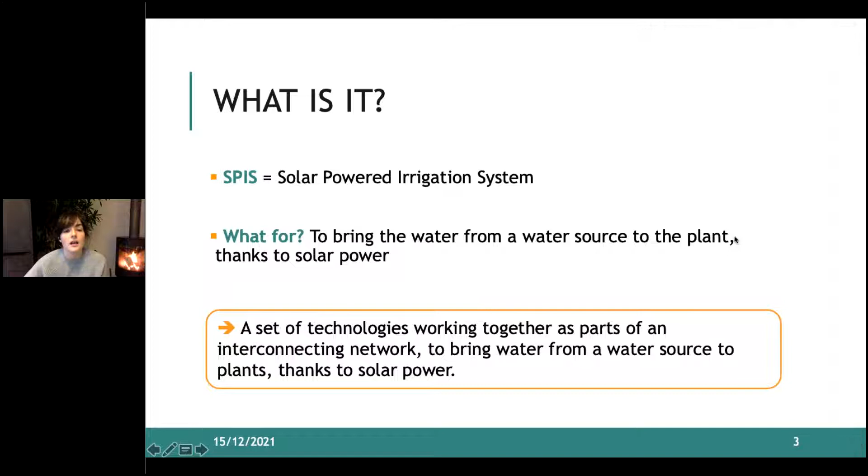And it is the following: a set of technologies working together as part of an interconnecting network, which is basically a system, to bring water from a source to plants thanks to solar power. So now that we know what is a system, what do we need to make it? Well, we need a water source, we need a pump, a solar generator,

which in most cases, if not all the time, will be solar panels, a conveyance system, which is basically the piping system that will bring the water from one element to the other, and an application system, which will be the technology that distributes the water between the plants, trying to give approximately the same quantity of water to each plant. I just wanted to point out that manual application, like for example with watering cans, is also considered to be an application system.

Now, as you can expect, for each of these types of technology, there are many different models, brands, types that exist and that are available on the market. But not all of them fit with each other and not all of them will match your situation. So basically, there is no one size fits all system, and you're going to have to determine which technologies fit with your context and which technologies fit with each other. But how to do that? How to select the right technology?

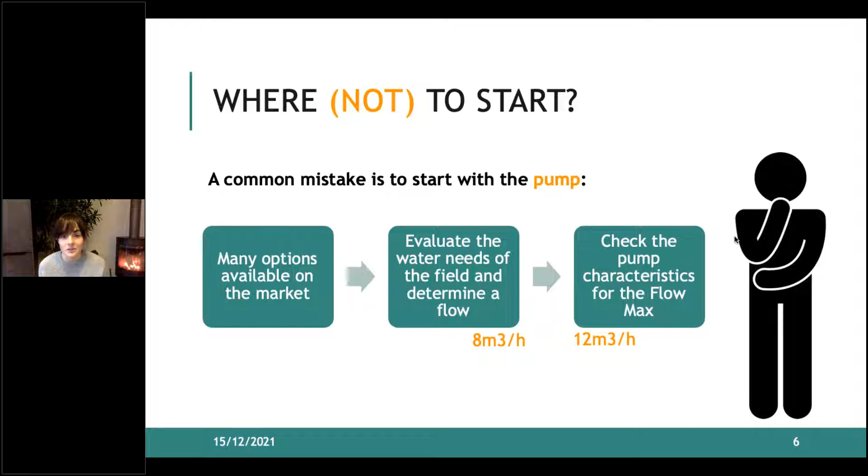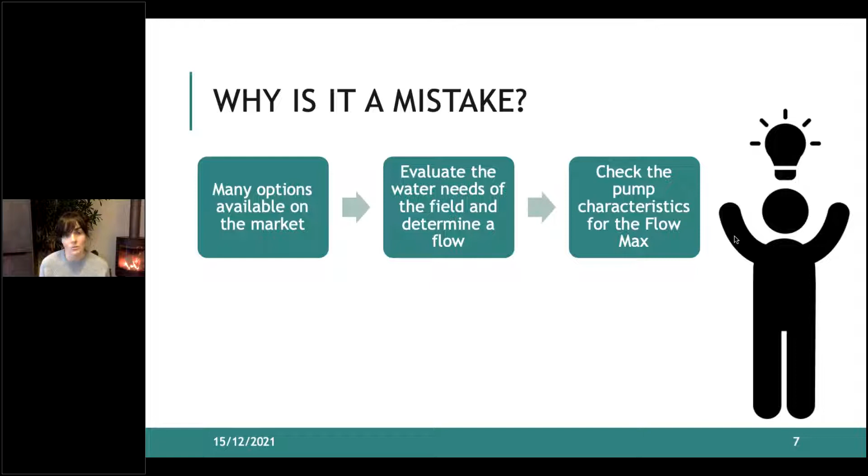Well, the truth is there are many reasons why it wouldn't work. And I'm going to explain now 2 of the mistakes that you made and 2 of the reasons why it might not work. The first thing is that you looked at the needs of your crops, the needs of your field, but you did not look at your water source and at the water that was available in your water source. So if you're pumping water from a river that never dries or a lake, then most likely you won't have this problem.

But if you're using a well or a borehole, when you pump water out of it, the well needs to recharge. There needs to be water flowing back in. And if the water that flows back in is slower than the water that you pump, your well will dry out. And no matter which pump you have, you won't be able to irrigate the whole field that you planned for. So most likely it means also that you used a pump that is too big compared to the area that you will be able to irrigate.

Maybe even your application system will be too big. So you basically run the risk of oversizing your system and also of not making an efficient use of the resource.

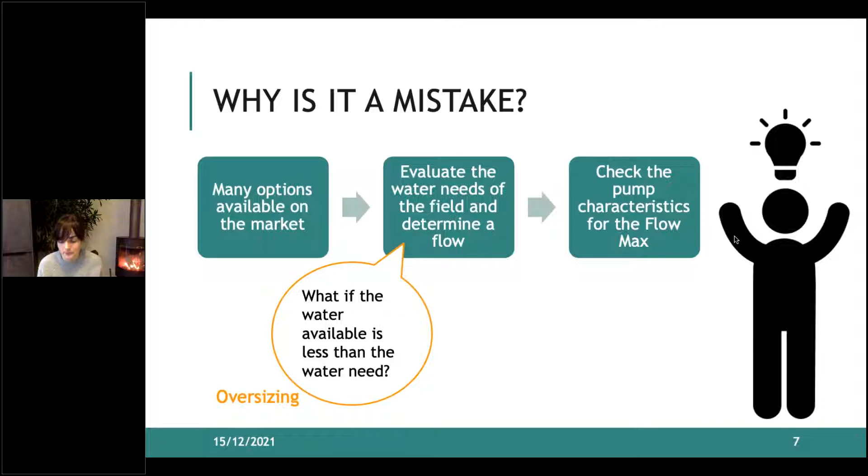Now, the second thing is that you looked at the maximum flow of what the pump can provide. But what you need to know is that the flow of the pump varies according to the depth of the water, the height of your system, the type of application system you're using, and even the conveyance pipes that you're using. So the same pump, if it's placed in a source where the water is at 3 meter depth, or in a source where the water is at 8 meter depth, it won't be able to provide the same flow.

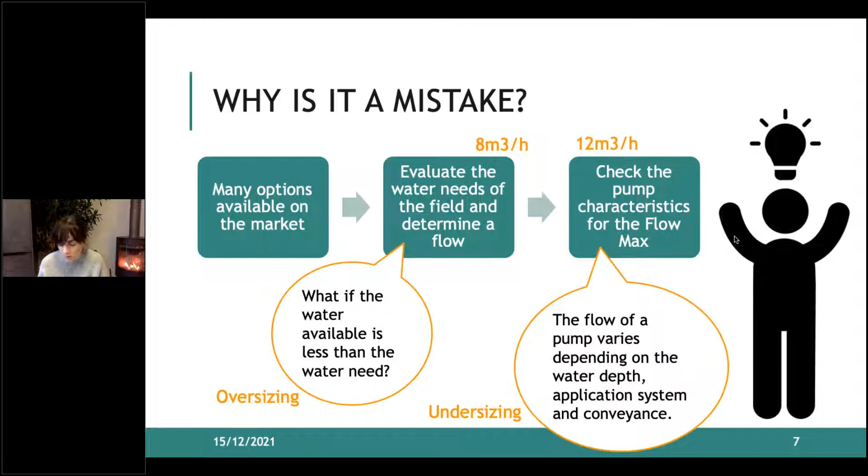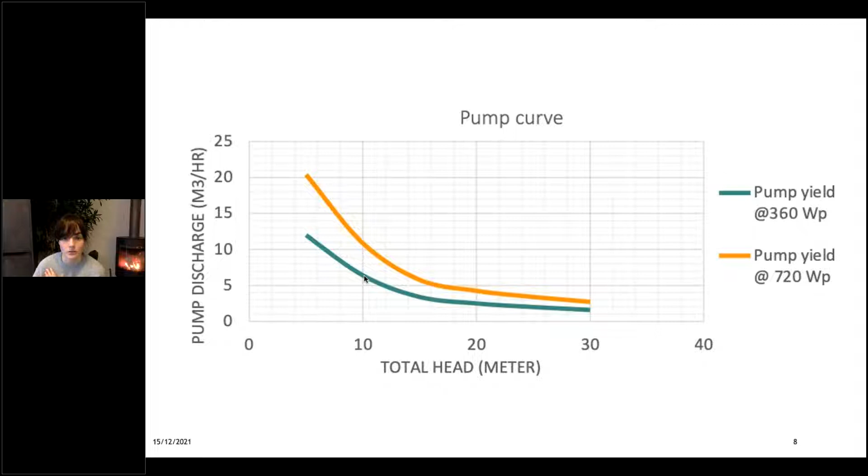I think it was important that I started by presenting why you should not do that, because it's important to understand the reasons why these mistakes are being made and why they should not be made, because it's a very natural way of thinking, I think, but you should always start at the water source. So that leads me to the next slide. You should always start by collecting information on what you have, and you should always start by the water source. You will be collecting information on the water source, the field, the application system, and the conveyance.

But in your system, the most limiting factor will always be your water source, because you will be able to change the size of your field. You will be able to change the type of application system you're using. You will be able to change the size of your conveyance pipes. But changing your water source is almost impossible. Sometimes in certain situations, you will be able to what we call improve the water source and increase its yield, but it's costly, it's not always doable.

You might not want to change the size of your field or the type of application system that you're using, because it has a certain cost and certain practical implications, but it remains possible. The water source most of the time is just a given, so you have to work around it. And that's why it should always be the starting point when you design your system. And you should always estimate the yield of the water source, meaning the volume that is available during a certain amount of time. All the other information will allow you to calculate the required pump flow, which is basically the water that is needed by your crop times the efficiency of your system.

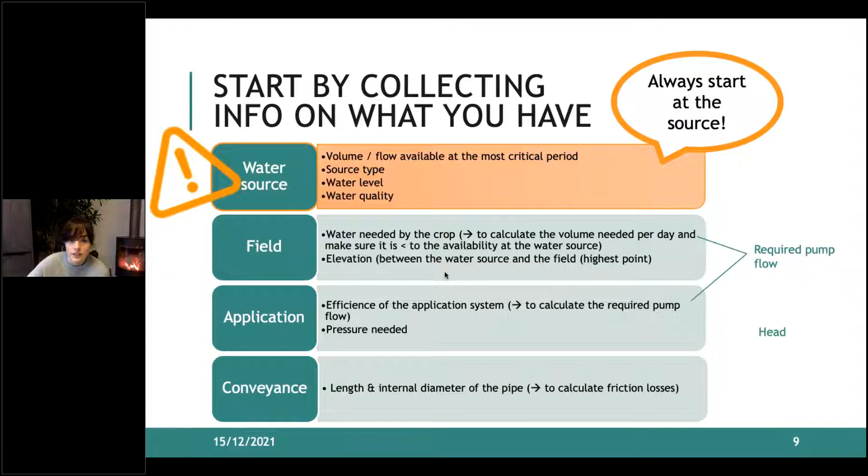Here, I considered the efficiency of the application system because we always advise to use a piped conveyance system, and then the losses are very low, so they can be neglected. But there are definitely losses in the application system because no system is always 100% efficient. And the rest of the information will be used to calculate the head.

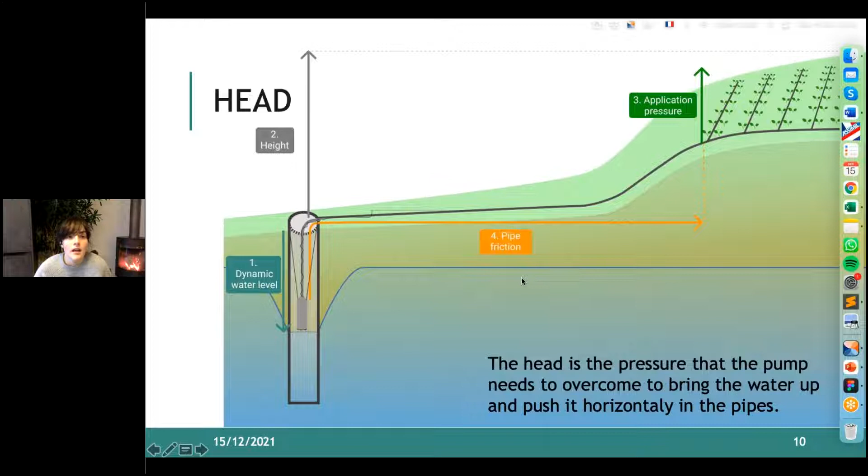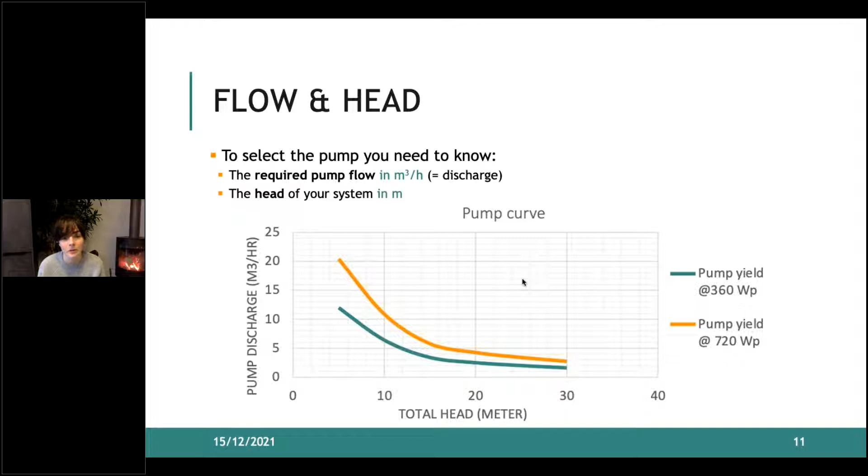Now, once you have collected all this information and you have calculated the required pump flow and the head of your system, you can check again the pump curve of the pump you're considering to buy. I've summarized here the information that I have been telling you so far. So first of all, regarding the flow. So you calculated the required pump flow.

The required pump flow is always more than the water needed by the crop, because you need to account for the losses in your application and your conveyance systems. But this same required pump flow should always be lower than the water that is available at the source. Otherwise, you're going to have a problem. So pay attention to that.

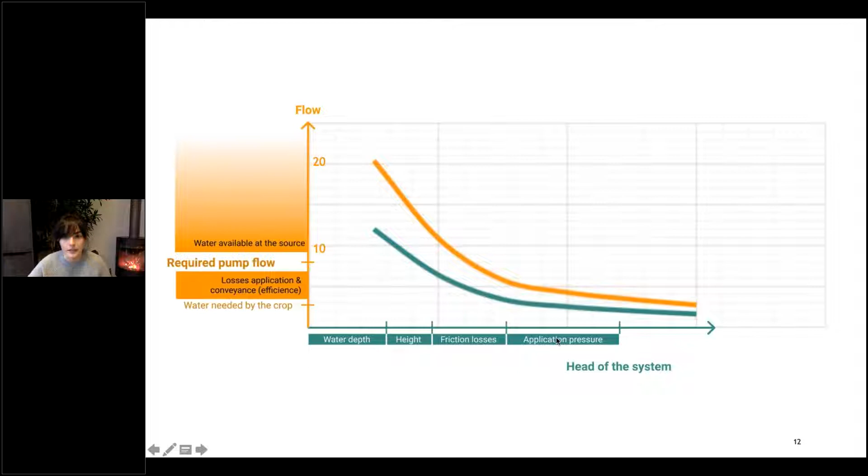Now, on the other axis is the head of the system. It's the addition of the water depth, the height, the friction losses, and the application pressure. And you come up with a total head here. Now, if I draw the points of my system, I see that I end up here. So actually, very far from the two curves I have been drawing.

So even if you use more panels, there is a certain limit of panels that you can use per type of pump, you will most likely never be able to get the required pump flow that you have with this pump at the head of your system. So you can either drastically reduce the size of your fields or make improvements using an application system that requires less pressure and is more efficient. Or you should maybe consider another type of pump.

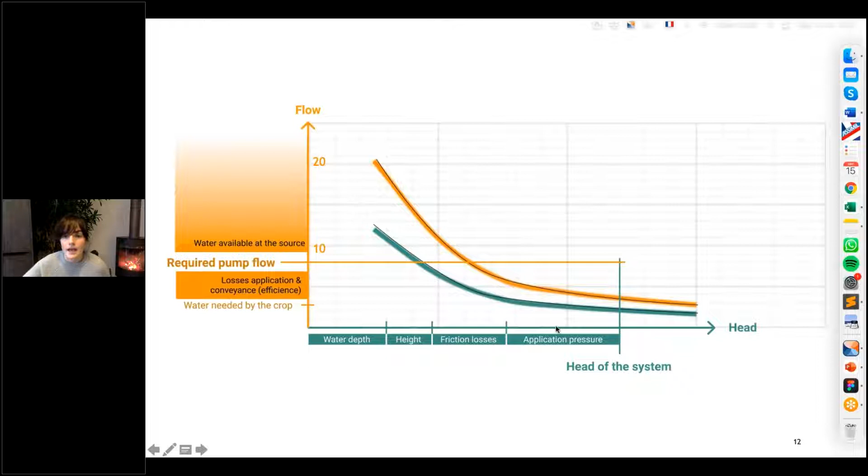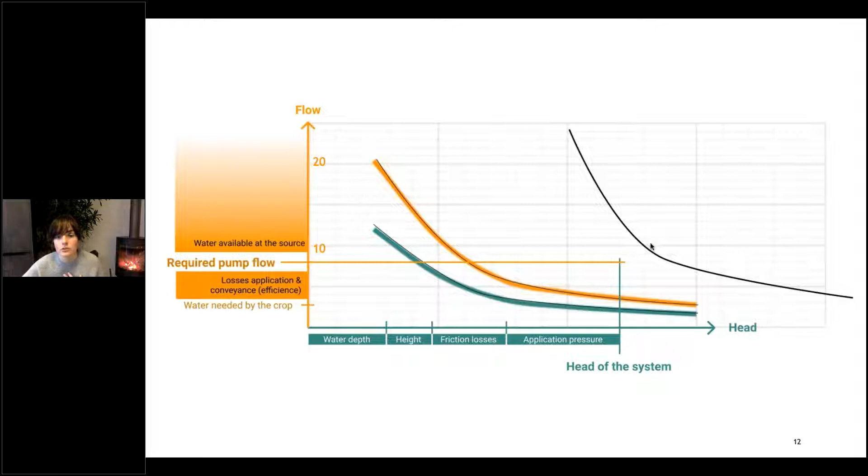And a solution might be a pump with this sort of curve. So here you also see that the curve is a little bit far from the points that you drew. But then it's about finding balance between the other aspects like your financial capacity and whether you have the possibility of extending the area that you want to irrigate or if it's not really an option.

That leads me to my next slide, saying that it's not all. There are many other technical, commercial, financial aspects that you need to consider when buying a pump. You should never neglect the required pump flow and the head of your system, but there are many more choices that you need to make. For instance, you will have to choose between a suction and a lifting pump. Using a suction pump is not always possible.

You will have to determine the number of solar panels that you need. According to the type of water source that you have, you won't be able to use all sorts of pumps. For instance, if you have a borehole, some pumps are too big and will never fit in there. If your water source has some sandy water in it, not all the pumps will work in there. You need to determine whether the repairability and maintenance aspects of your pumps are important or not.

There are also some commercial factors, like what are the technologies and the services associated with these technologies that are available locally? Is a warranty important for you? I put the financial aspect in third, but actually they're very important, especially considering that solar irrigation technologies are expensive.

And there are also social aspects that you want to consider, like the risk of theft. How easy will it be to secure your pumps or your other technologies? How easy is it to transport them? For instance, if you want to share them with a neighbor and he irrigates one day and you irrigate the other day, the pump needs to be transportable.

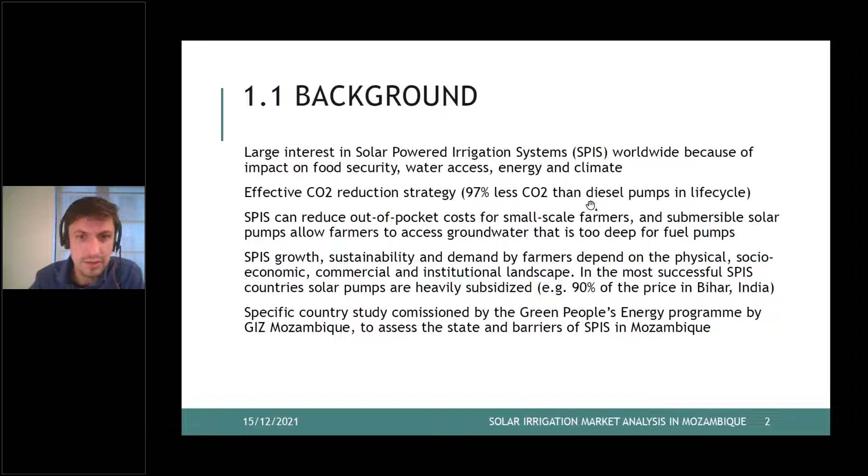So the objective of this study was to analyze the current technologies that are available in terms of off-grid solar powered irrigation technologies and the promotion strategies that are in place targeting small-scale enterprise farmers with less than 2 hectares in Mozambique. And we intended to use this information to formulate recommendations for the further promotion and acceleration of this market development.

We started with a stakeholder mapping to get to know all the actors that are working on solar powered irrigation in Mozambique. We started with the manufacturers and asked them, who are your contacts in Mozambique, who are your clients, and so on. And that's how we assembled quite a list of organizations, many of whom are present here, so that's nice. We contacted those suppliers, governments and NGOs, and asked them to fill in online surveys about the technologies, but also the promotion mechanism.

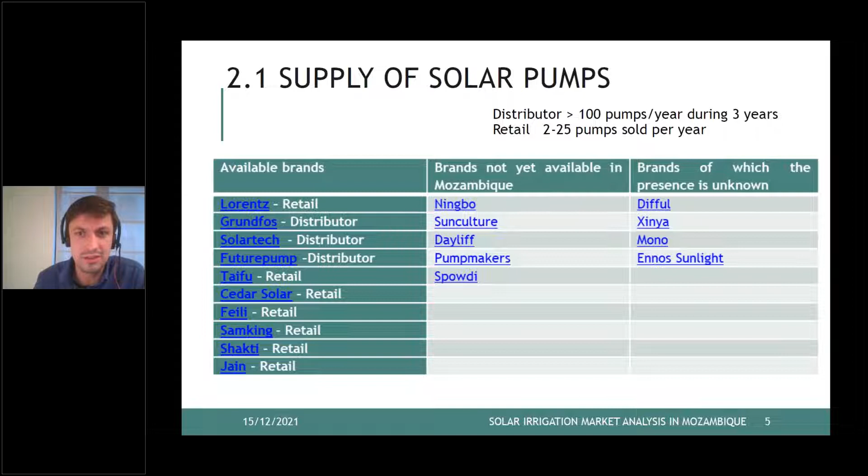Asking these suppliers about the water source that their pumps are used with, we found that deep boreholes and rivers are the main water sources used with solar pumps. A big concern here is that most farmers do not have access to either deep boreholes or rivers. So this is something to take into account when we want to scale solar powered irrigation pumps.

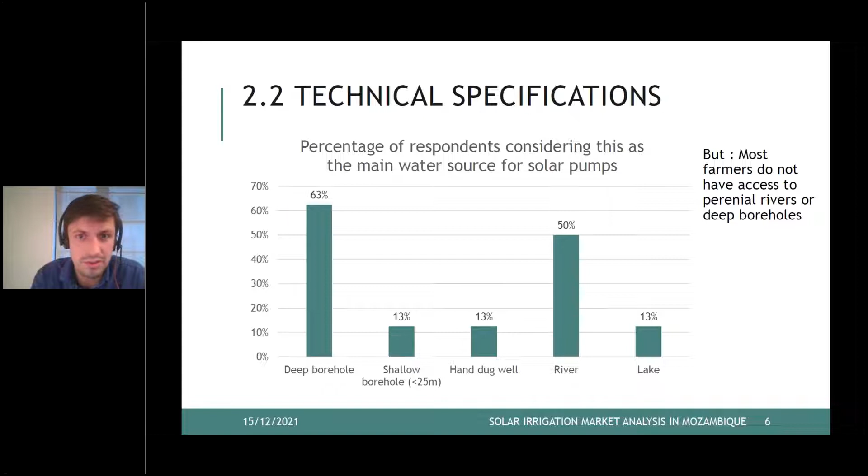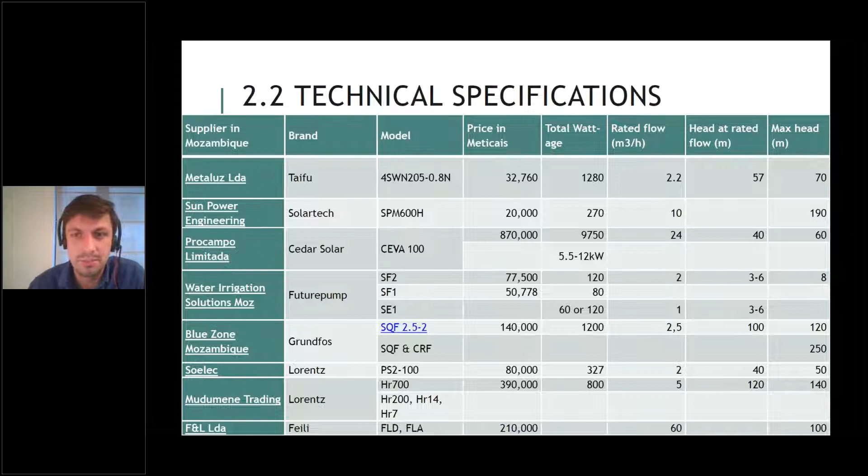This is just an overview. I'm not going to read it all, but these are some of the specific models, prices, and capacities of pumps that are available in Mozambique. The report will be available on Energypedia, and you can also find the links to all the suppliers in Mozambique and the manufacturers of these pumps to find all the detailed information that you need.

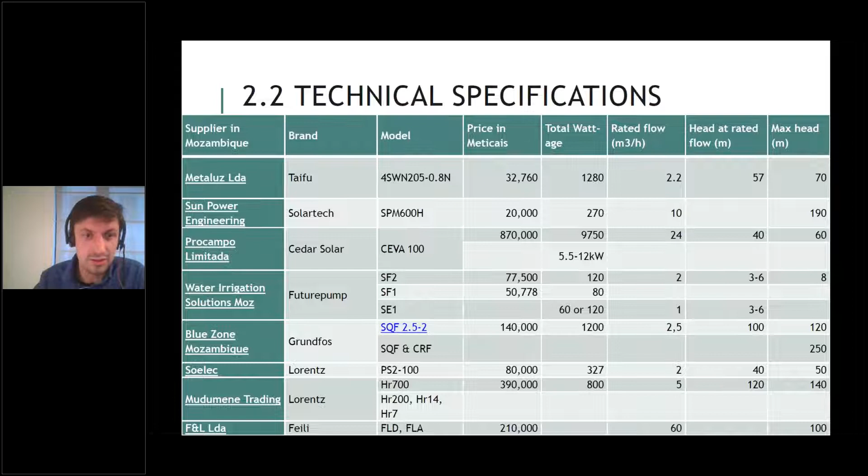This is a snapshot from the beginning of this year, but I must also warn you, the market is developing rapidly, so information may already be outdated at this moment. So it's good to keep on checking the suppliers' offer through the links that are available in the report.

An important remark I'd like to make is that it's very difficult to compare prices of different solar pumps and models. On the one hand, because of the capacity, as Marion already explained, you cannot compare pumps if you don't know the daily water need and the total head that it is based on.

Next to this, there's also large differences in the components that are included. So the prices communicated by the suppliers did or did not include solar panels, frames, cables, installation, transport, and so on. So you need to ask a lot more questions if you really want to compare the prices of different technical options and different pumps. Also, the warranty varies. Most common warranty provided by suppliers is about 1 year. There's one providing 3 years, 2 actually, and some are actually unknown.

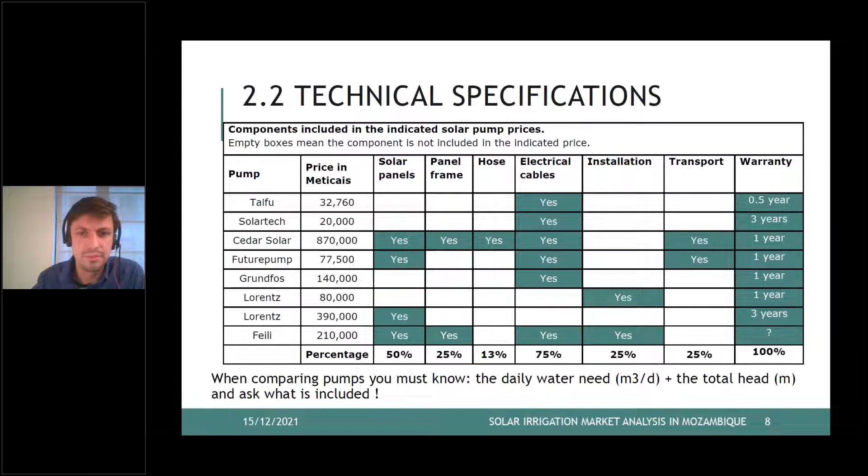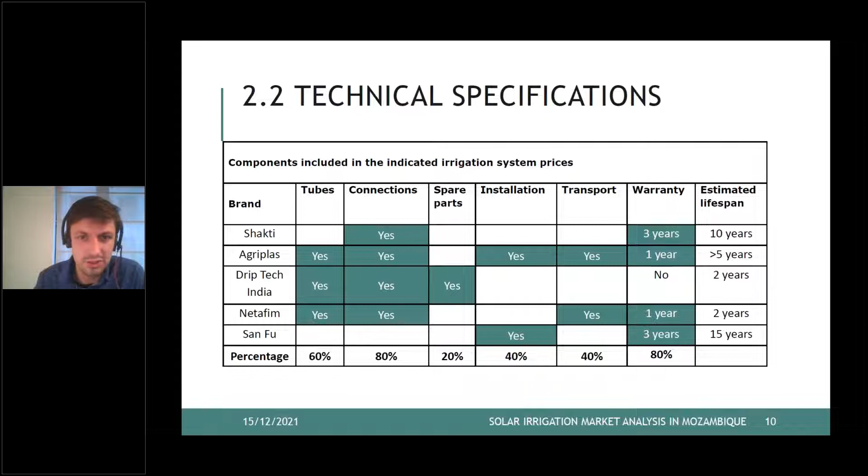But overall, it is a lot cheaper solution compared to drip irrigation. That is not yet widely available in Mozambique, only in Chimoio at the moment. And here again, we also see differences in the components that are included when the prices are communicated. So again, important to ask whether the price covers installation, transport, spare parts, and so on.

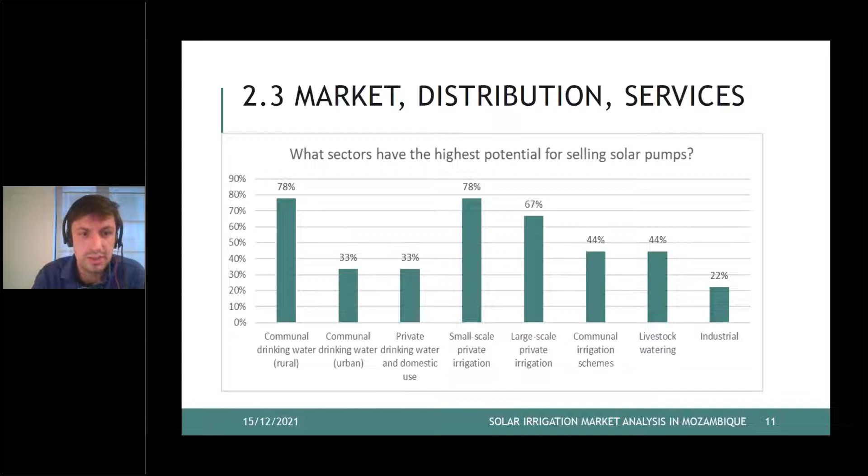The suppliers indicated that the main markets, the sector with the highest potential for them, is either small-scale private irrigation or communal drinking water supply in rural areas, as you can see over here.

I asked everyone a question about spare parts and where they are stored, and we see that this is very different from one company to another. It had a direct relation with the average downtime. So the time between farmers reporting a failure of the pump and the moment the company could repair it. So the average downtime was 9 days, which in the dry season could lead to a lost harvest if a farmer cannot find another pump that he can use in the meanwhile.

So that's problematic. However, we found that those companies that store their spare parts at district level manage to intervene in 2 to 3 days, whereas those who have to import it need at least 15 days or more. So this is a direct relation and shows the merits of having more local or regional branches in the country.

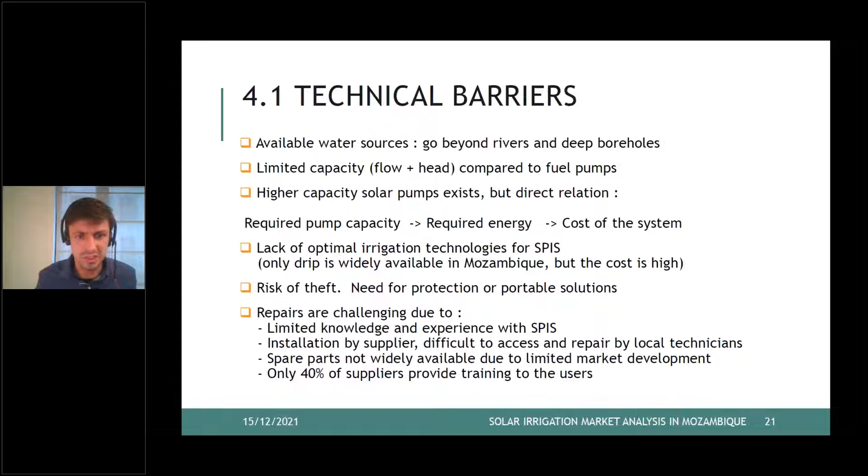There's also, going from the technical barriers to the commercial barriers, we see that the private sector is very divided in regards to the demand of solar pumps. Some consider it actually very low and others very high. There's no median. But still, 44% of the suppliers is planning to invest a lot in solar pumps in the near future, which may have to do with the availability of external funds as well.

The main challenges are the lack of knowledge and especially finance, according to 64% of the suppliers that responded to the questionnaire. The government launches tenders, sometimes big ones, for solar-powered pumps, but unfortunately they are not accessible for most brands or suppliers because of all the criteria. We see that when comparing solar to other powered pumps, for example, more taxes are involved.

So there is no general tax exemption for solar pumps, even though in some projects there are exemptions. There's a 7.5% import tax on solar pumps compared to a 5% one on agricultural technology, but solar irrigation pumps do not qualify as such. And there's a 17% VAT, whereas hand pumps, for example, are VAT exempted. So it seems that the solar irrigation pumps are in between, but don't benefit from any of the tax exemptions or reductions.

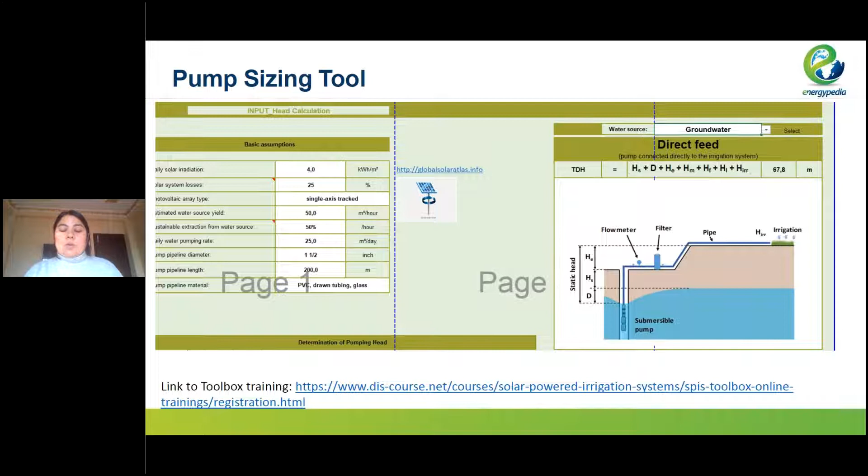It also allows you to choose what kind of water resource I'm looking at, groundwater or some other kind of resources, and so on. So again, please have a look at both the tools and other tools at your own pace. Moving forward, I wanted to show another toolkit. It's called Solar Pumping Toolkit. It is developed by the Global Solar and Water Initiative. And again, this is also designed to be very comprehensive. So you have information from the basics of what is solar pumping to all the guides to, again, doing cost comparison, checklists, and so on.

So again, have a look at both the tools. For example, one of the tools just to introduce as part of this toolbox would be cost comparison, which is really a big factor. How does my solar powered system compare to a hybrid system? How does it compare to other kinds of systems, like a diesel system? So this toolbox has individual Excel sheets or Excel tools that you can fill in, and you can do the cost calculation. So just to give you a brief snapshot, this is one of the tools that is part of that toolbox. I encourage you to click on that link.

Once we share the presentation, you'll have the link, and then you can go through that link and see which tool would be the best for you, because both of these toolkits have a lot of different individual Excel-based tools. So you can choose what is my demand, or what am I trying to calculate, and which one fits best.

And one more thing that I wanted to point out, which Marian also briefly talked about in her presentation, but we often don't pay much attention to, is water tanks. Water tanks can be an efficient way of meeting your demand without having to oversize your systems. And it's always a tricky question, how do I size my water tanks? What are the factors? Unfortunately, I don't have any Excel formula or Excel sheet I could give to you.

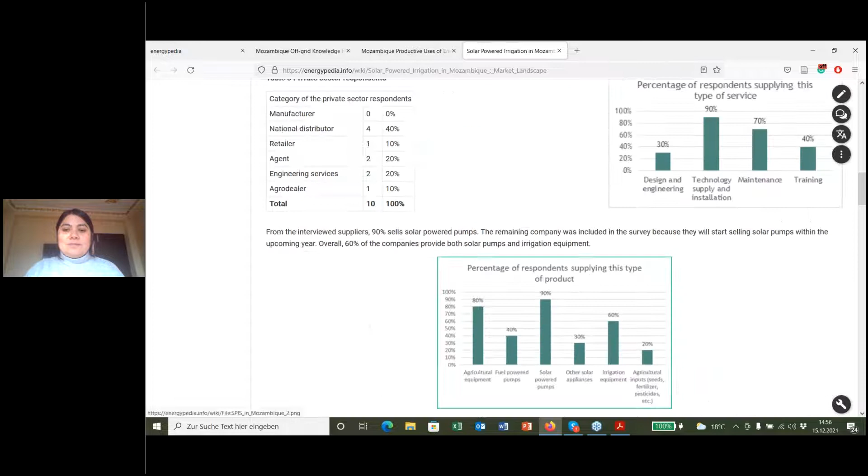So I highly encourage you to have a look at the hub, click around, explore it. If you see anything that you think is not correct, please do reach out to us. We welcome any and all feedback. And yes, all the information, as I mentioned before, is already put up, including the tools that I talked about; all of those are linked here. So you can definitely have a look at all of those. And if you have any questions about any of those things, please always feel free to contact us.